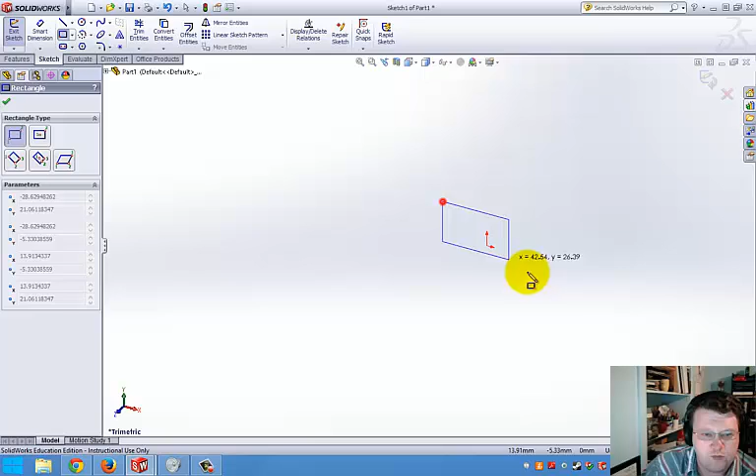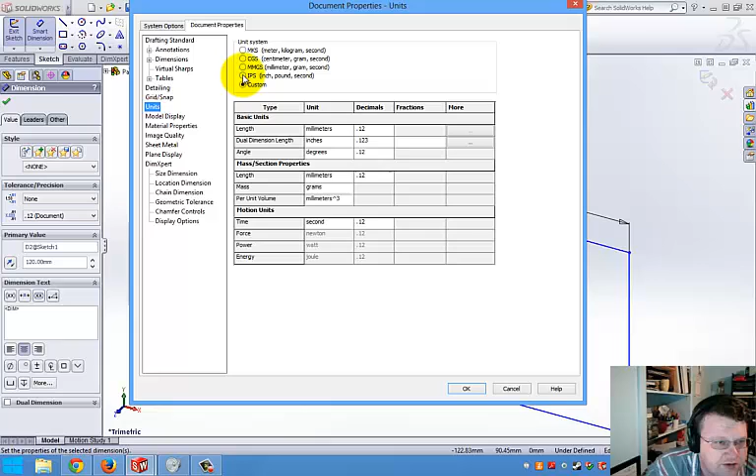We'll draw a rectangle, and then we will dimension it. It looks like we need to be 120 millimeters by 120 millimeters. First thing I should have done is gone back into Options, Document Properties, and checked my units to make sure we're in millimeters. We weren't, but now we are. So now I can go to Features, Extrude, make this thing 30 millimeters thick, say OK.

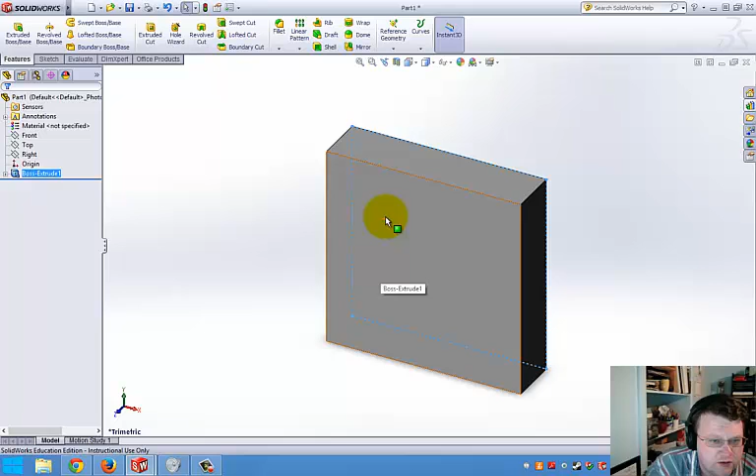Just as a reminder, the middle roller zooms in and out, and if you hold it down, it dynamically rotates. Let's get back to isometric. And if you hold Control down while you push the middle button, it pans. There we go. So now we have our part.

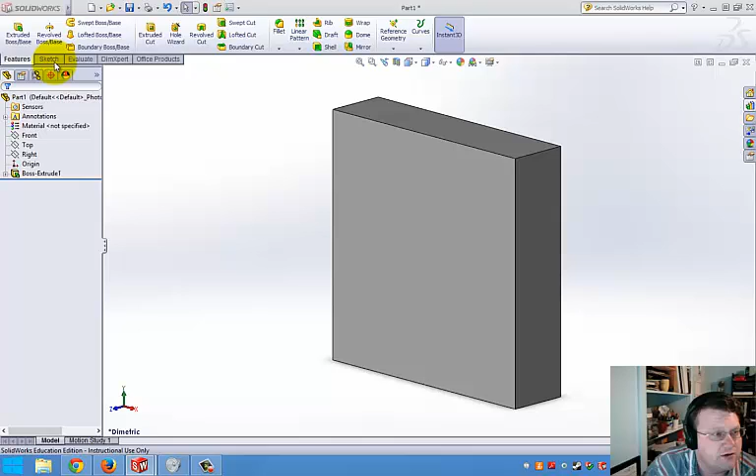Next thing we're going to do is extrude that little boss that's in the middle. Let's go sketch a circle on that plane. Let's do some smart dimensioning. It needs to be 70 millimeters. And then 25 thick, but let's work on centering this.

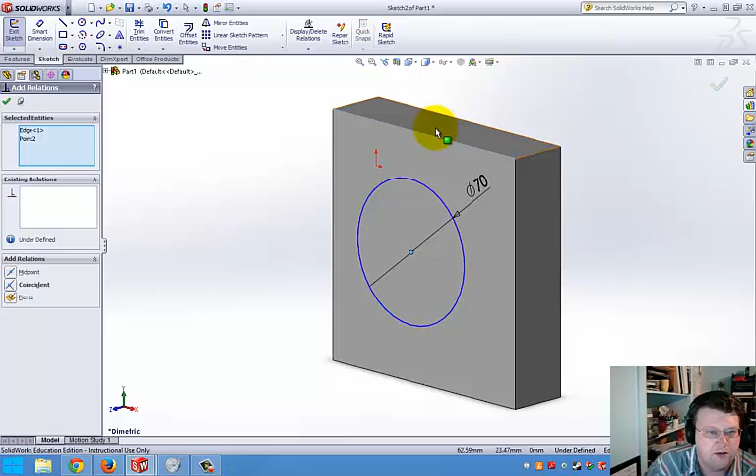So let's go and add a relation. You can do this many different ways, but I'm going to say the center of that. Click on that, and let's say midpoint. We actually don't want to do that. Let's go and do that. We know that's 120, so let's just do a smart dimension. 60, because it's 120 and 120. There we go. Now it's in the middle.

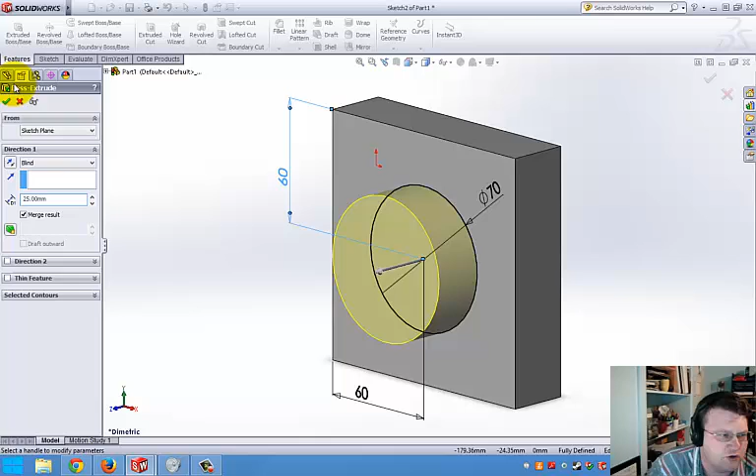Features, Extrude, and it needs to be 25 millimeters thick. And we want to make sure it's merged. There we go.

Now let's cut a hole right through the middle. We can go Sketch, Circle, on that face, and we might be able to snap to the middle. If not, we'll add a relation. Click, well, we can click on the circle. Let's delete the point. We've got the arc. Let's go with that arc and say concentric. Now it's in the middle. Perfect.

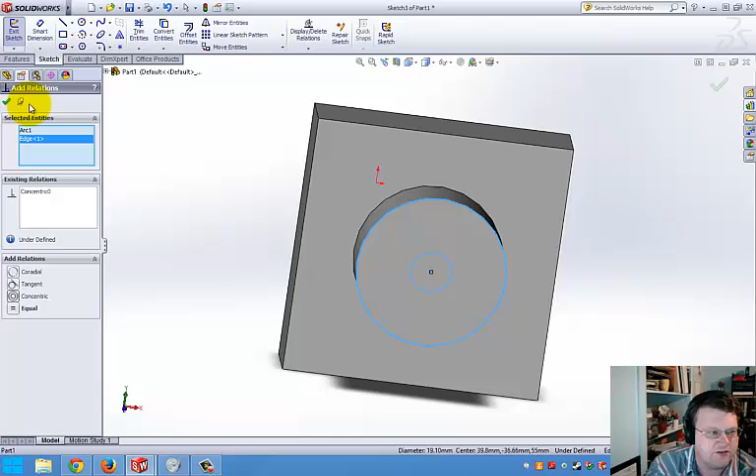Now let's cut that. So we go Features, Extrude Cut, and we can make that through all. Oops, we forgot to set the diameter of that. So let's go back and edit the sketch. Smart Dimension. It is supposed to be... we don't know what that's supposed to be.

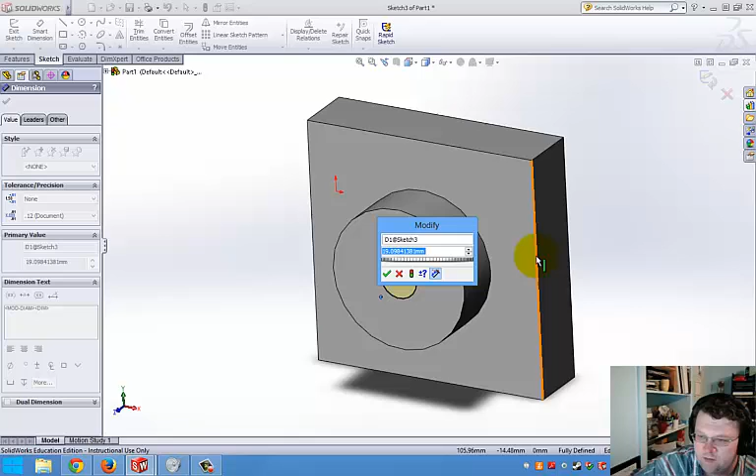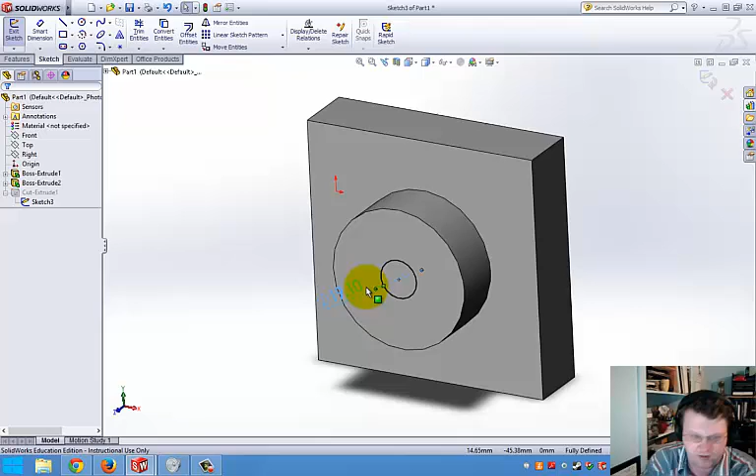We know it's supposed to be between this line and that line, and that is supposed to be 10. I need to get rid of this dimension first though. So now let's try it. Oops, I unchecked the smart dimension. There we go. Hit escape a few times. Let's delete this and try it again. Smart dimension, middle, edge, there we go, 10.

Alright, so now let's go Features. Oh, say OK. End that, return back to it. Now it cut through. Now we're going to create fillets.

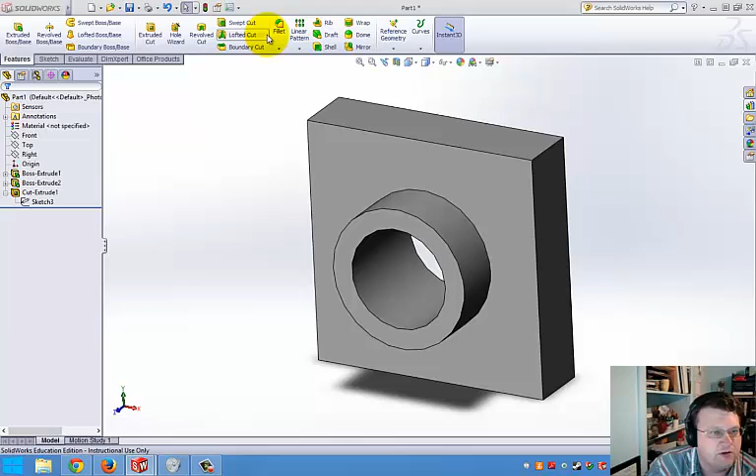All around over here is going to be 5 millimeters, but everywhere else on this edge will be 1.5 millimeters. So let's go fillet. That edge, that edge, that edge, that edge, that edge, that edge, that edge, that edge, and that edge should be 5.

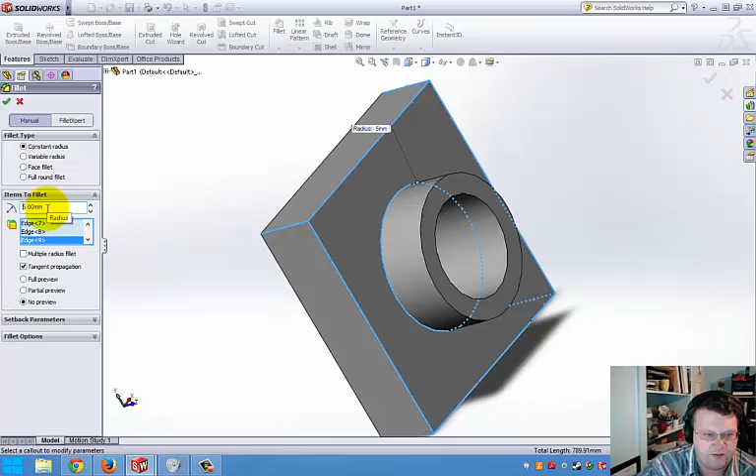Okay, that looks good. Now, all this edge - if I pick that flat surface, it'll get both edges. Let's go fillet, and this is 1.5 millimeter. There we go. Very nice.

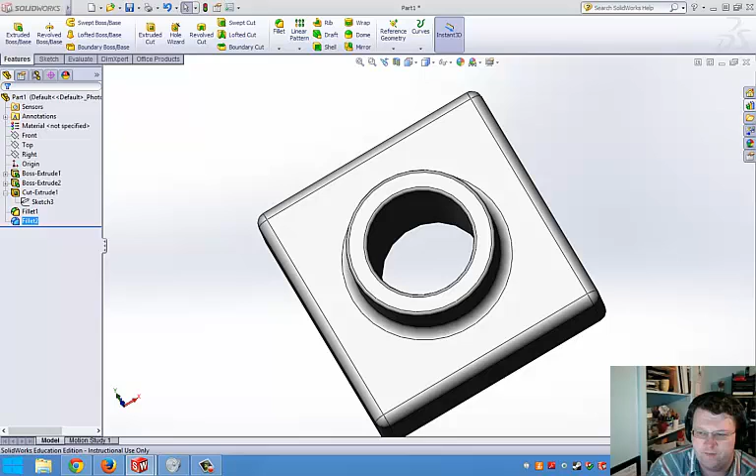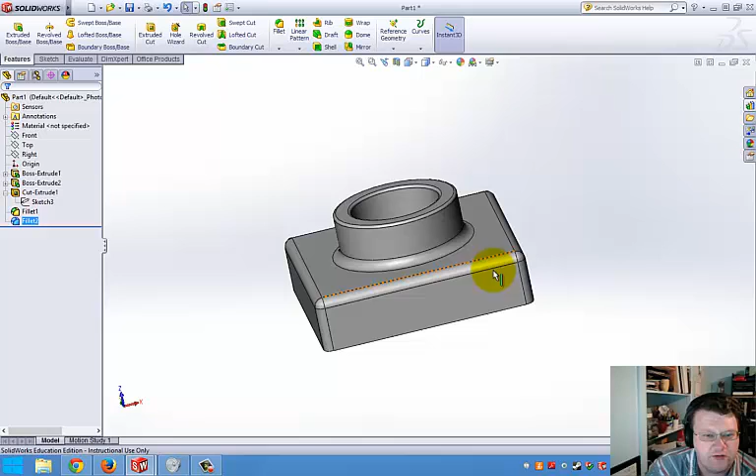So when we did the fillet, or the radius, we could have actually just picked this face and it would have put that at 5, these around at 5, and we would have been good. But we didn't quite do that, we just did a different method. No issues. Alright, and we already created those radiuses.

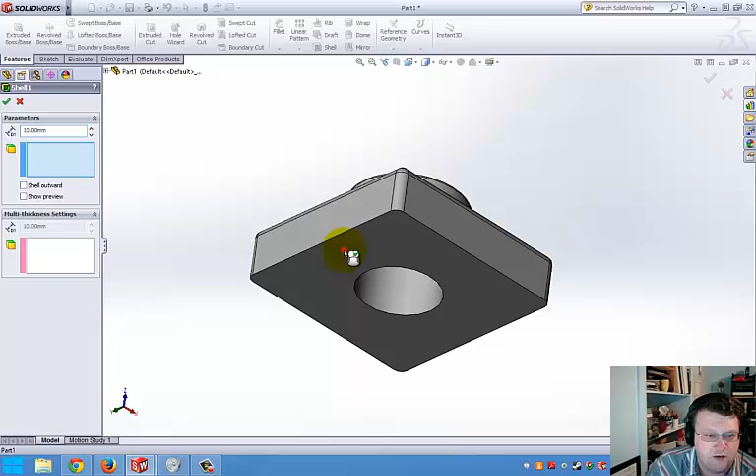Next thing we're going to do is turn this into a shell. So let's tip it up, click the shell button, click the bottom. How much do we want width-wise? We want 2 millimeters left. Let's click on preview and see if it shows us. Yeah, it looks pretty good. Say OK. Look at that. Very nice.

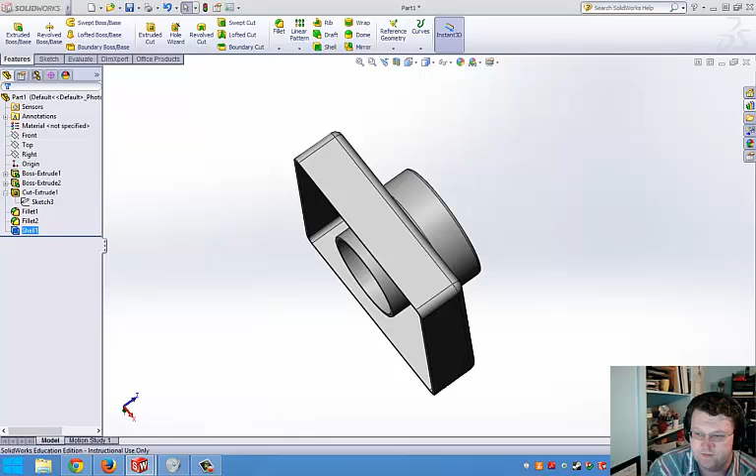Now the next thing they do is, well, that's it on this part. They also say to add a realistic appearance. Let's see if we can do it on this. So we can go... we're shaded. Okay. And then we should be able to go Tools.

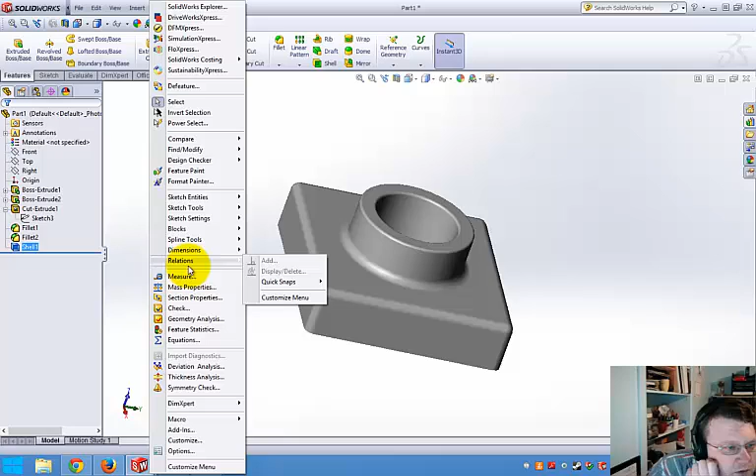Okay, so we can't view the real graphics. We could here, and then it...